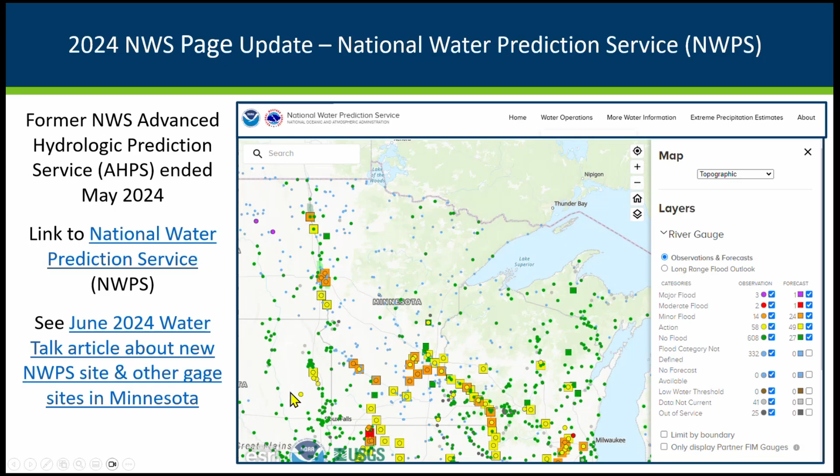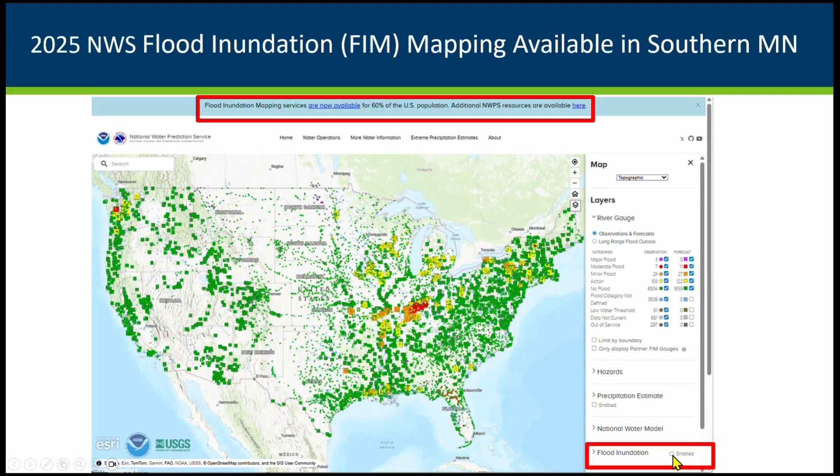The most recent update is that the National Weather Service now has what they're calling their flood inundation mapping tool. This is showing the national map. To turn on that tool, go to this flood inundation part, where there's a link to information at the top about this relatively new service. It's newer in southern Minnesota. To turn it on, scroll down below the gauge links and enable the flood inundation portion.

Zooming in on Minnesota, these reddish boundaries show that the southern part of the state now has that flood inundation mapping available. We understand the rest of the state will have it maybe in about a year, so not too far away.

While we're on this view, I wanted to point out the map options up here, because when you zoom in you'll probably prefer the satellite or aerial view. This example shows a site in Vermont, but this is what will be available in Minnesota for areas anticipated to have flooding in at least the next 5 days, as far as I understand how far out they're going with this. We had an article about that in Water Talk back last September that will give some helpful information.

This is an example of a clip I took this morning at a site in Indiana. I went looking for one of the gauges that was higher, and that red I know is the more moderate flood risk there, so I figured I'd show some interesting flooding. A couple things to point out: when you turn it on, it's really opaque, so you probably want to use the transparency bar. Also, you can turn on the county boundaries in this administrative boundary option.

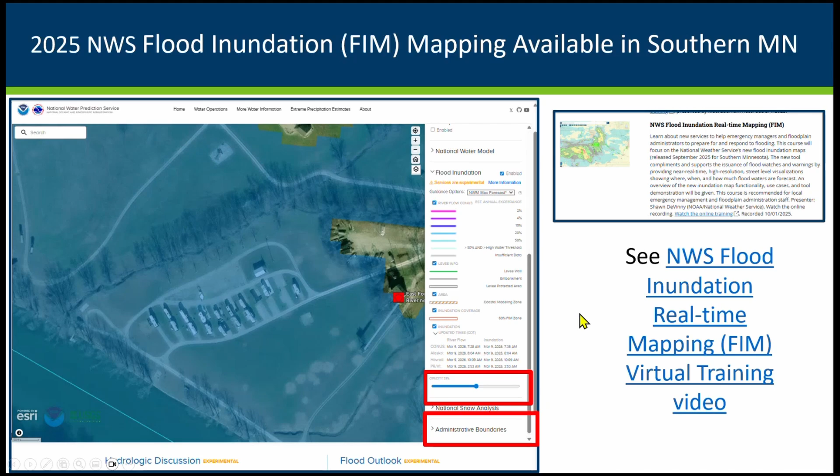We do have a recording of a training that Shawn DeVinny with the National Weather Service gave on using this site back in October, and that's available on our training site. This site is going to be really helpful in the future, and as we have higher water levels this season, we'll be checking it out, especially in that southern part of the state. Moving on, let's talk more specifically about your post-disaster responsibilities and substantial damage determinations.

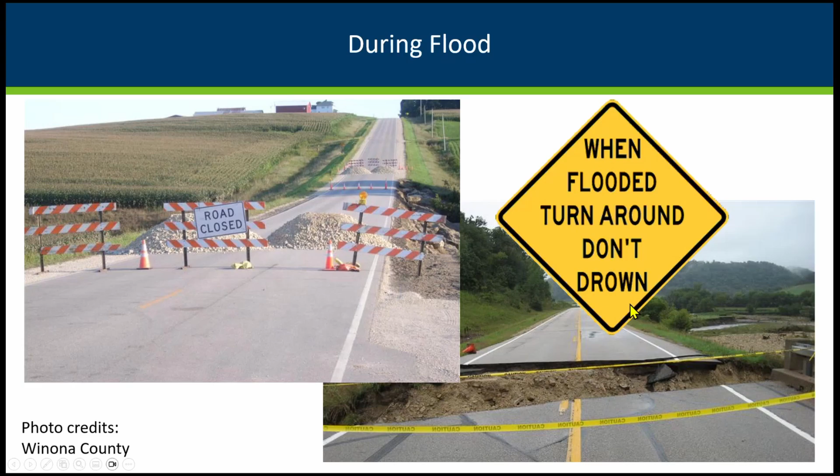Here's an example of a road that would have been closed during the flood. You can see how the water came across and washed away a part of that road. During the actual floods, that's one of the community responsibilities - helping to get the word out that you've got barriers up, that some of your roads are going to be closed. We don't want people driving through those areas because you don't know what's below that water that's on the road.

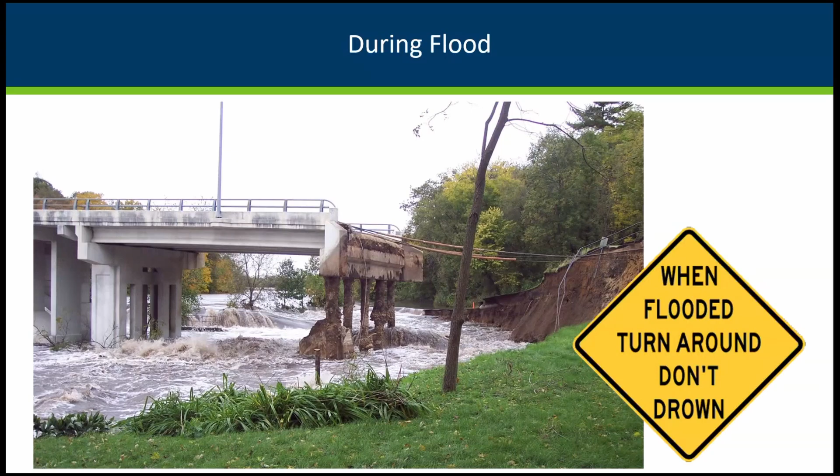Here's another example: if you're just seeing the road, used to going across this bridge, you might think you can get across, but you don't know what's happened to that bridge. So a big part of our education and communications during the floods is keeping people safe, keeping them away from places that have damage. We do know that most common death situations are people who try crossing areas that have been washed out, and people didn't realize it.

But you'll be happy to have those boundaries, those watermarks, later as you're trying to figure out how high the water level got, and trying to map out where in your city, where in your community, you most likely had the water and had damages.

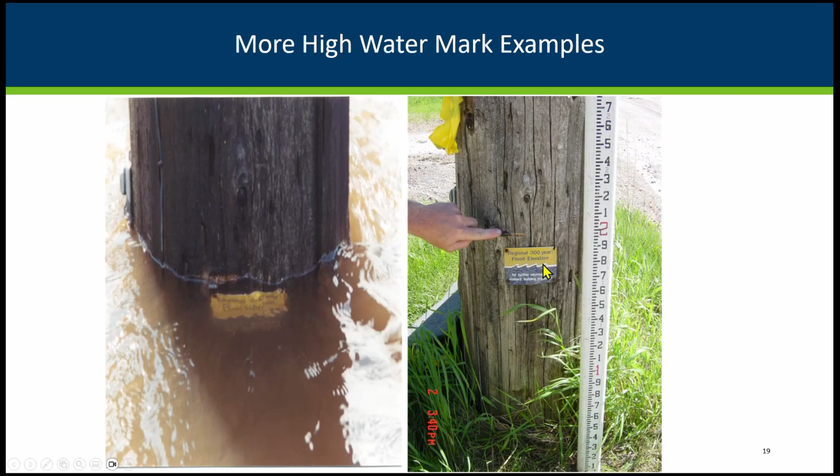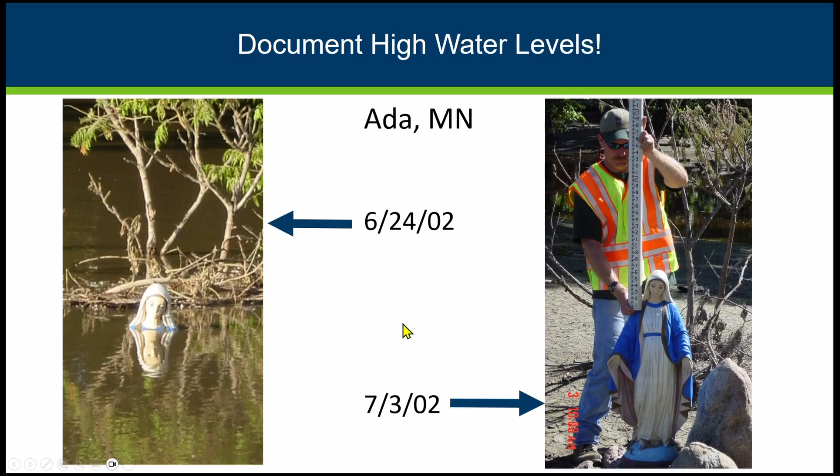The other thing at the local level you'll want to do is track your time for your staff, for your volunteers, looking at those hours and efforts in responding to the flood. Because if there is a state or presidential declaration, you'll need that documentation of what additional time, what overtime was spent, what additional hours were put in.

Communities are really getting good about using their social media for all different things. During the floods, we've seen communities do a great job of getting information on their websites, working with their local media, their radio stations or newspapers, and especially using social media - Facebook and various other social media sites. During the flood, it's those safety messages: don't go to this part of the city, don't go on these roads, they're closed.

And immediately after, there's a lot of questions about what do we do with the debris? How do we get help? How do we sign up for inspections and possibly getting some help from the state or the federal government? But also in your role as local administrators, reminding folks that they need to get permits to do repairs.

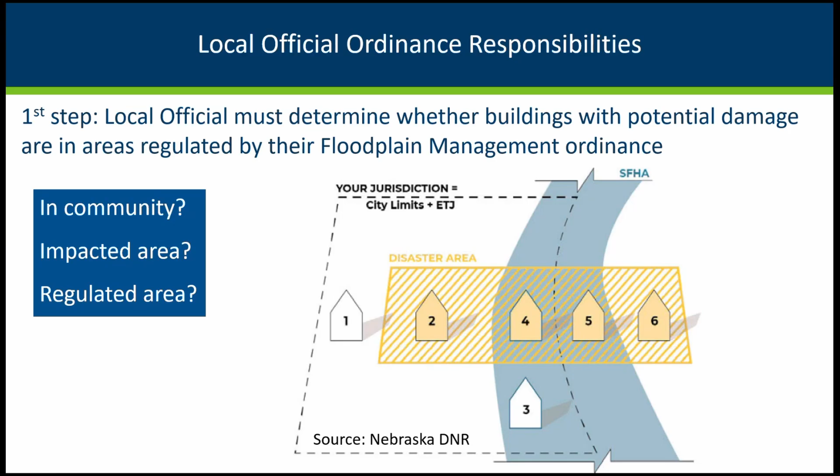And in this example, we're showing the special flood hazard area, that 1% annual chance flood is just this area. So out of all these buildings, we've narrowed it down to 4 in the community, 2 in the impacted area, and just 1 that's actually in the floodplain area where you must do those substantial damage determinations and require permits if there has been damage.

We do have this little flow chart because some people like flow charts versus checklists. And it does kind of step you through: Was it in the floodplain, in that 100-year floodplain where your regulations apply? Was it substantially damaged? If it's close or a yes, then you're going to go do that substantial damage determination. If not, then the community can issue a repair permit for whatever repairs need to be done, and that person can get right back in there and do those repairs.

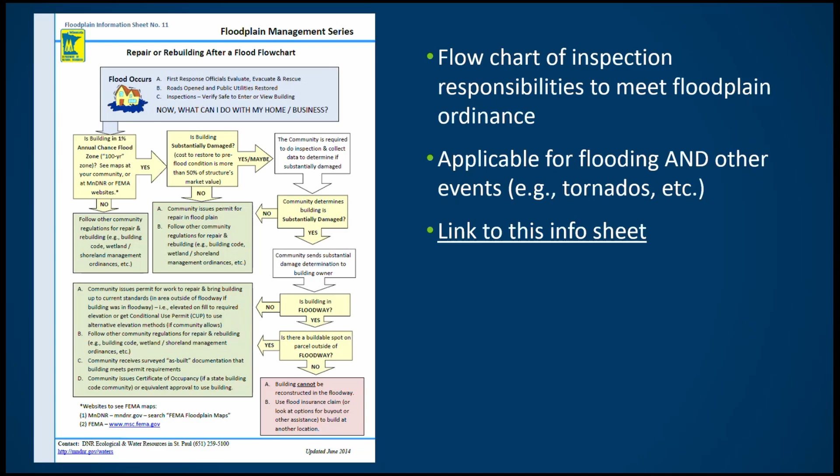FEMA does emphasize you need to be giving repair permits when you're having a big flood. Part of that is because folks have a tendency to, while they're in there doing their repairs, go beyond what was the flood damage or tornado damage, and do other improvements that they've been meaning to do while the contractors are doing the work. So you're being clear about what it is that they're repairing so that they're not doing substantial improvements and hitting that 50% trigger with the improvements and the damage together.

So you're going to review those damaged buildings. Again, even if it's not flooding, maybe you had a big tornado that affected a part of your community, you're going to be looking in the floodplain area if any of that tornado damage was in that floodplain area. You're going to look at, is it clear that they're substantially damaged? If so, you're going to issue them that determination. If it's something that's clearly not substantially damaged, maybe they had a little bit of damage, but it's clear that they're not substantially damaged, you can give them that repair permit, let them go on.

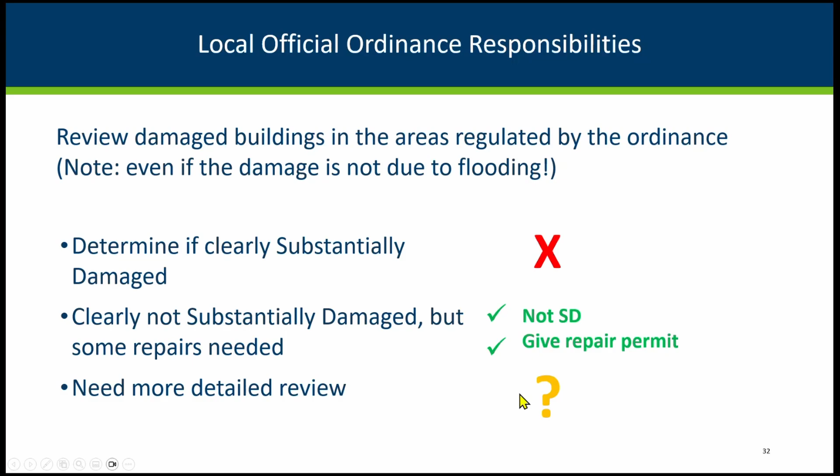Those that are in that 35 to 65% range, you're going to probably want to get more details, do a more detailed inspection. A lot of times, even if you didn't see where the water went, you didn't have good watermarks, you're going to have a pretty good idea just based on where the debris is that's in the community. Those are the neighborhoods that had the damage, and you're going to need to be looking. Some of your initial inspections and screenings can be more or less sophisticated.

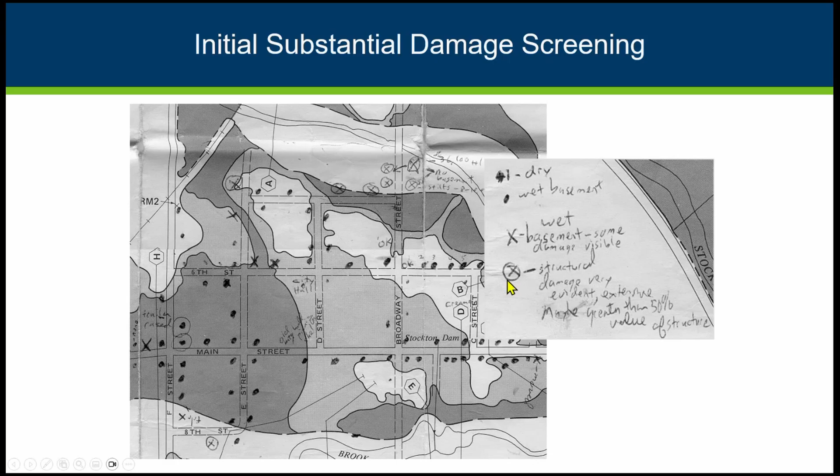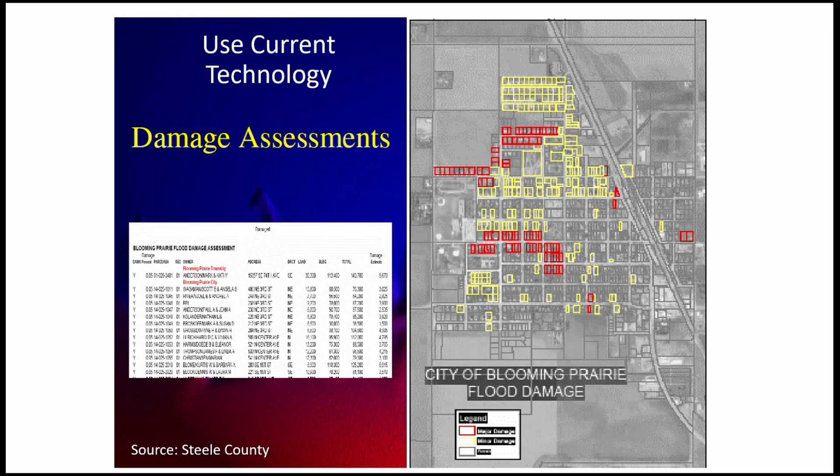This is an example from a small town. They literally went out there with the FEMA map at that time and marked which buildings they looked at, and which ones were potentially damaged more and needed a more detailed look. But these days, most communities and certainly all the counties have better GIS systems and are keeping nice electronic records that can be shared in different ways, showing where those damaged buildings are.

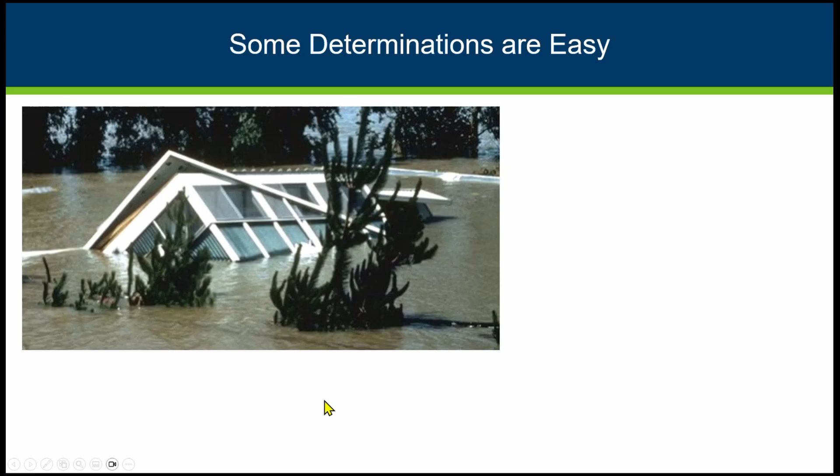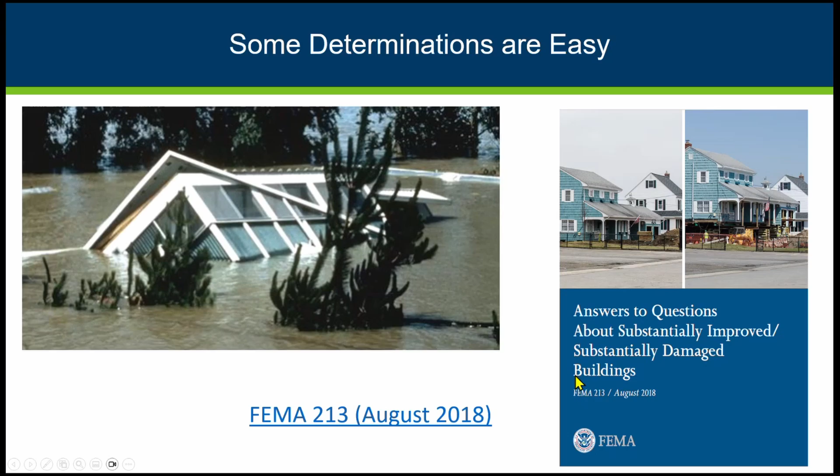Some determinations will be easier than others. Here's an example of a building that was clearly substantially damaged. If you're seeing manufactured homes with any amount of water on them, they're usually considered substantially damaged, based on what we've heard from people who've been involved in many different kinds of floods in the past. Here's one of the FEMA documents that's more of a summary of some of the most common questions about substantial improvement and substantial damage.

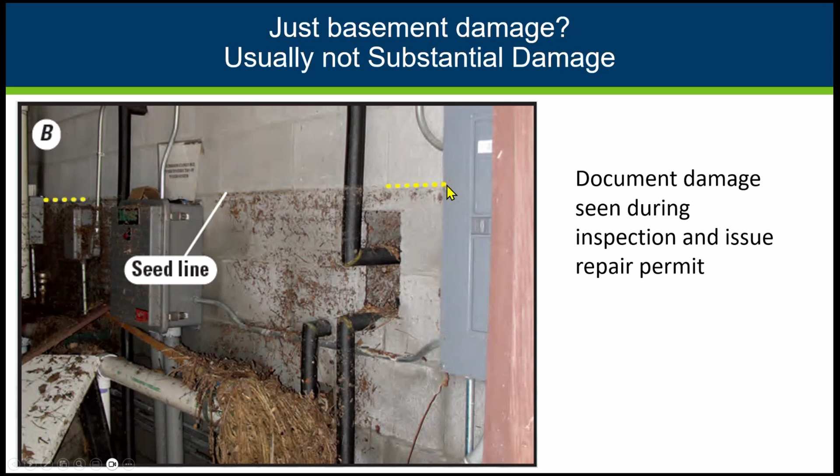In basements, which is where a lot of our flooding still occurs in Minnesota—we like our basements, and we've got a lot of them, especially in buildings built before we had floodplain maps—usually it's not going to be substantial damage in a basement. Most commonly, you're going to have damage to the furnace, the water heater, maybe some other utilities, but usually it's more the cleanup you're looking at. There can be cases where you've got foundation damage; there you're more likely to see substantial damage. You're getting in there, documenting it, taking pictures, making sure those pictures are associated with the correct address and PID, and documenting what happened there.

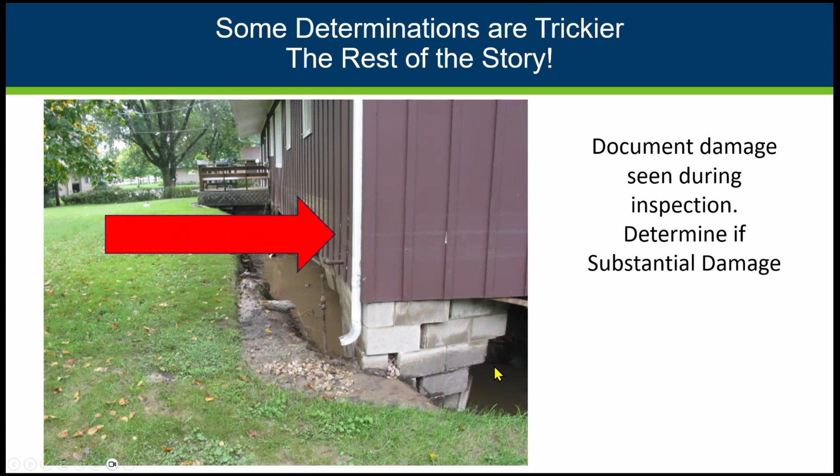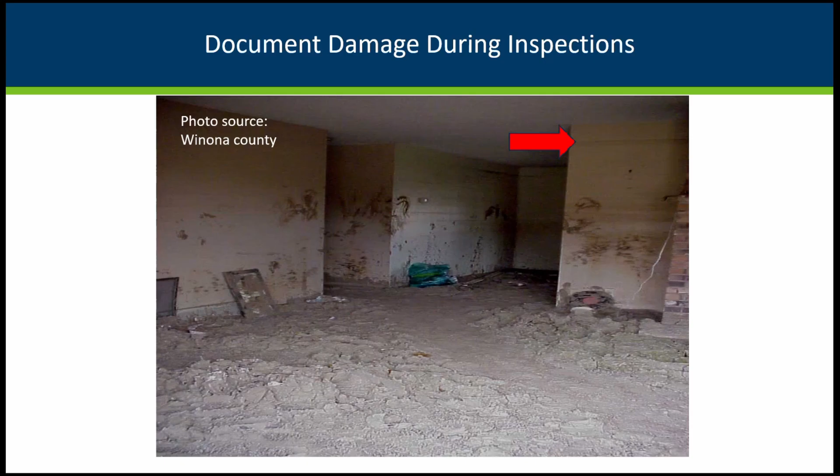In our playbook, we have some tables like this, based on experience gathered over time, showing what depth of flooding for what kinds of buildings you're most likely to see damage. So for a 1-story on a slab, if you get up to 1.5 or even 2 feet, you're more likely to have substantial damage, whereas with 2 stories you go up a little higher, which makes sense. If it's a mobile home, pretty much any water—if they get even half a foot up on the main level—it wicks up and damages the whole building. That's something we see and hear consistently.

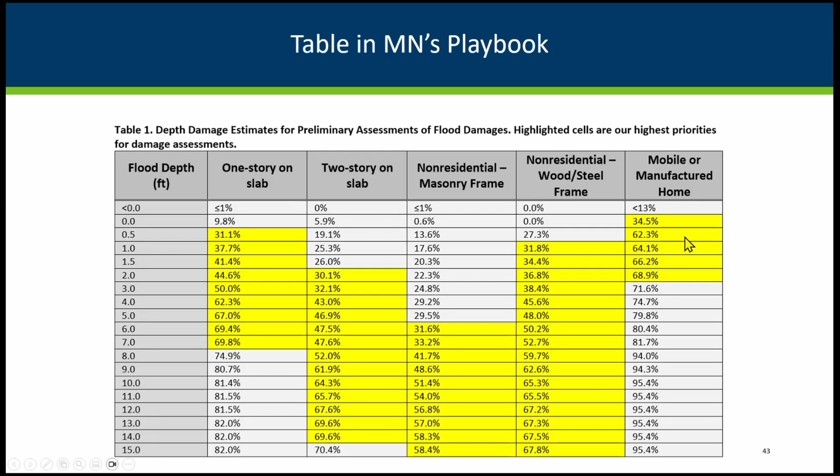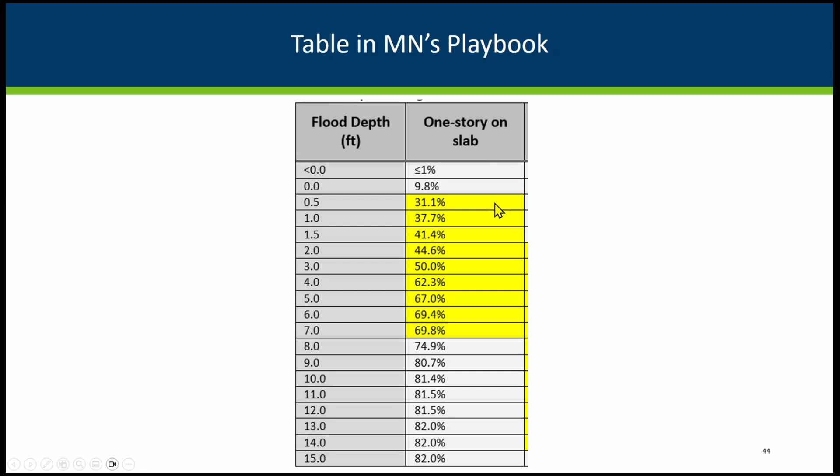So here, zoomed in a little more—communities might use this and say, okay, there's only basement flooding, we're not going to worry about it. But here we look at water getting onto the main part of the building, we're going to look more closely. When we do have potentially substantial damage, you need a more detailed review, breaking out all the different components—how much damage to the walls, the roof, the interior, in all these different categories.

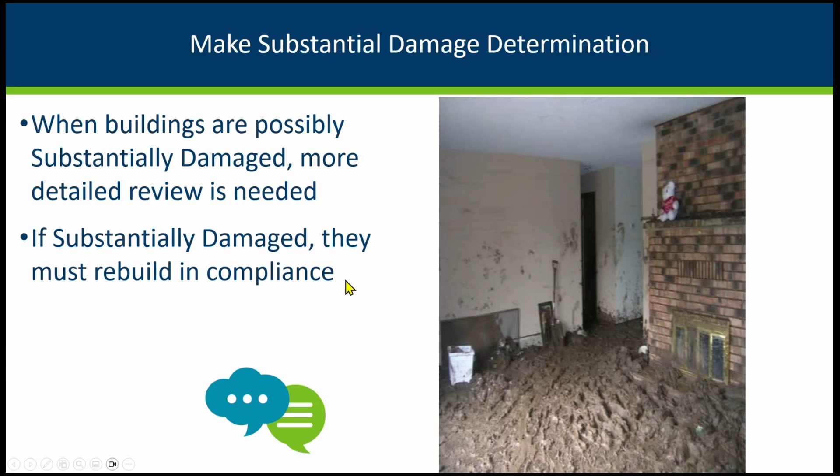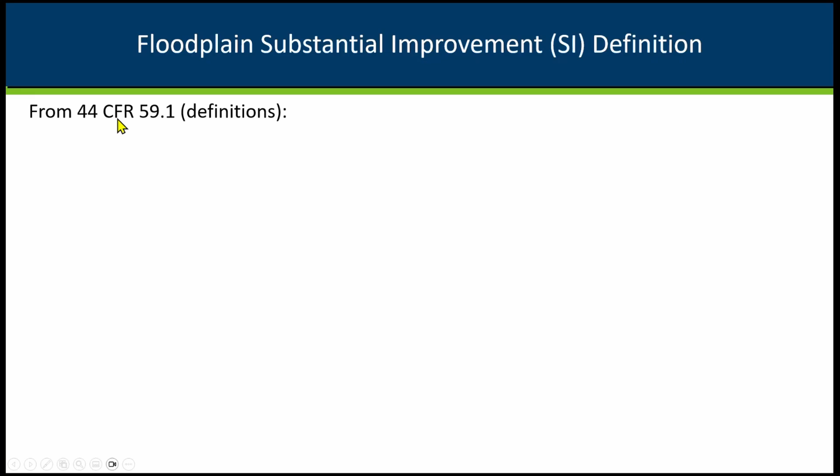We've talked about how this applies for flooding and for other kinds of damage, but I want to compare substantial damage to substantial improvement. From the federal definitions, the 44 Code of Federal Regulations, in the definitions section, they talk about what substantial improvements are.

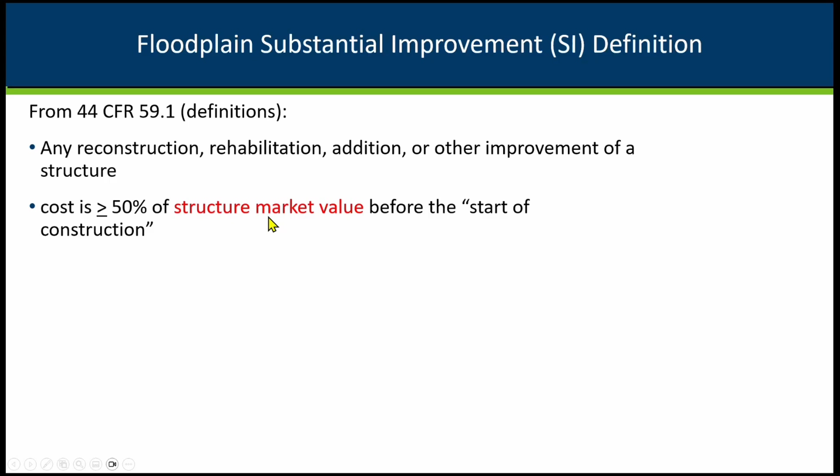And that includes reconstruction, rehabilitation, addition, or other improvement of the structure. That's the 50% trigger of the structure's market value before the start of construction. And when you're doing that, you're also looking at any repairs and improvements made within the previous year, along with the damage you're fixing at the same time.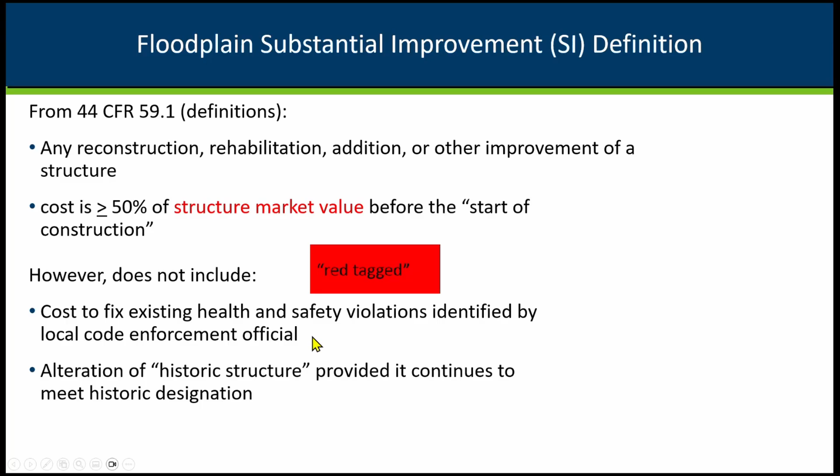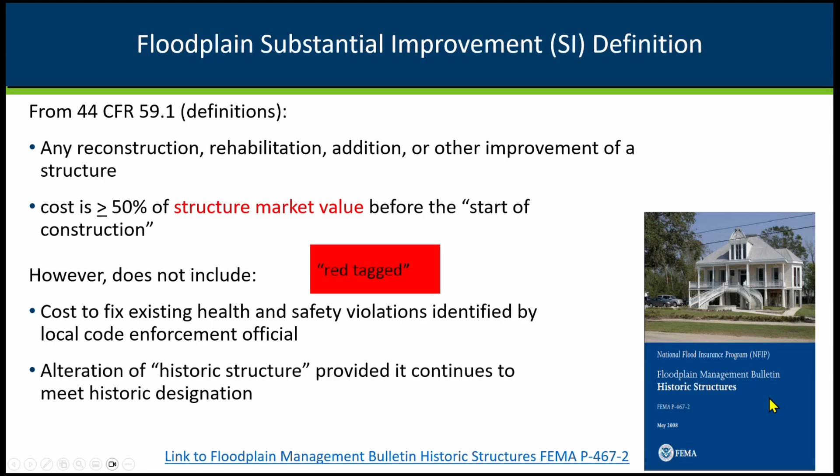There is some wording that says you don't have to include the cost of fixing things that were identified in advance by a government official—say they had red tagged the furnace or the electrical. Or if it's a historic structure, there are different rules, with a lot more flexibility on what you can do to repair it if it's officially designated as historic.

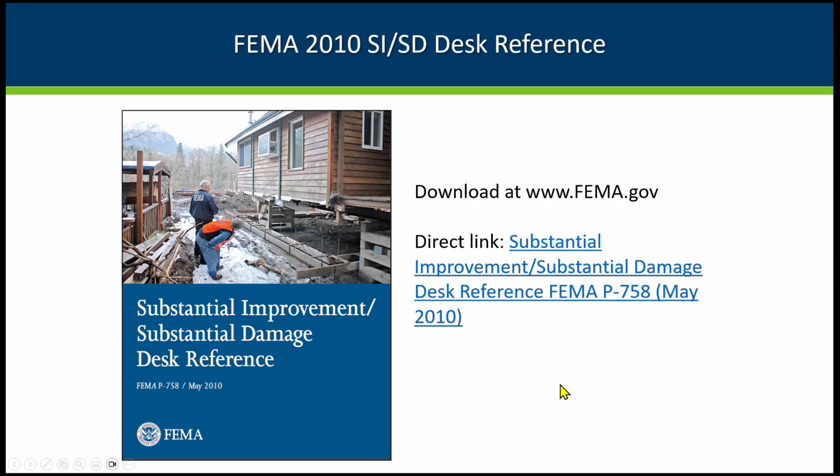FEMA's desk reference here is about a half-inch thick document, and there's a link here. It's a really helpful document that gets into a lot of nice detail, with flow charts to get you to the right part so you can determine if the damage is possibly more or less than 50%, whether it's substantially damaged or a substantial improvement, or not. It breaks things out nicely.

While we're talking about how you figure out market value—in most counties in Minnesota, the most consistent way is to work with your county assessor to see the assessed value for the buildings. In our county records, assessors show the assessed value separate for buildings versus land, which is good because we only want to look at the market value of the building itself.

In some cases, they may need a multiplier. I haven't seen that so much in Minnesota, but definitely in other states the assessed value might only be like 80% of the market value. That's something usually known at the county level, what kind of multiplier you need.

And if folks don't like the assessed value you're using, they have the opportunity to appeal it. In most cases, communities will accept an official appraisal as the appeal. If that appraisal shows the building has a higher market value, you can use that for determining whether it's substantially damaged or not, and you'll make sure your assessor's office has that for tax purposes going forward.

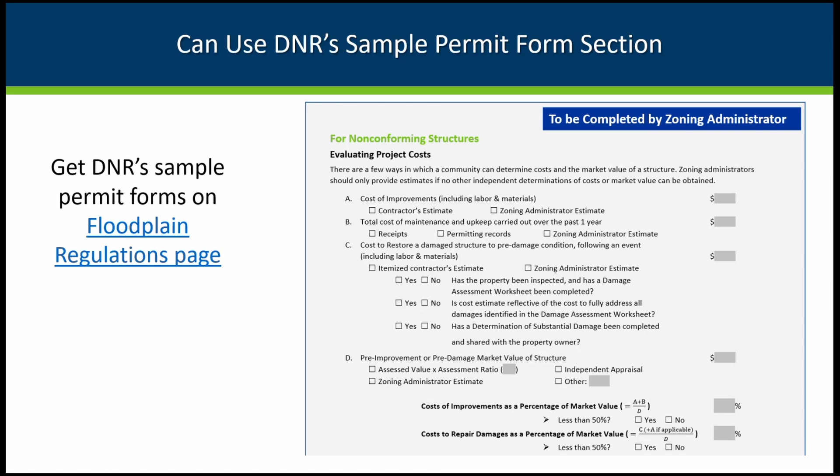DNR has a sample permit form—a simplified one for non-buildings, and this building version. For those non-conforming structures where we're looking at whether it might be substantially damaged, we step you through the steps to determine that. In our playbook, we follow fairly closely with what we've got in our sample permit form.

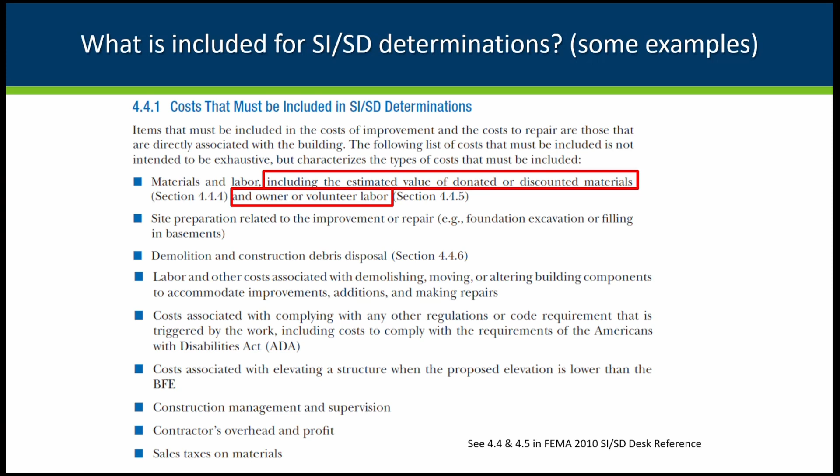In that FEMA desk reference, one of the other things they have is a nice listing of what must be included in the costs. A couple key things: someone might say, well, I'm just going to do all the work myself, or I'm getting volunteer labor—I got a bunch of buddies, I'll pay them with a case of beer and we'll do the work. Or, I've got all this material donated to me, so my cost is basically nothing.

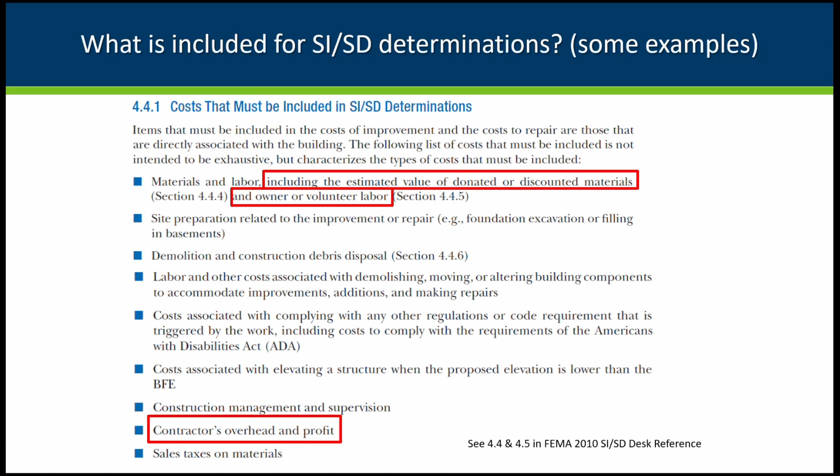But what the guidelines say is that you've got to look at what the cost would be if it was a contractor doing the work, not volunteer labor—you've got to look at what that equivalent value is. The FEMA specifics also point out you would include typical overhead and profit for a contractor in that part of the state. And it has a nice list of some things you don't have to include, which can be real helpful to make things clear.

In our playbook, we have a sample letter for when you do the determination and it is substantially damaged. In our example, we're showing the calculation at 60% damaged, so we have a sample letter you can put on your community letterhead and send to that household, notifying them officially that they are substantially damaged and that they'll need to work with you on bringing that building into compliance with your current ordinance.

And if they do have a flood insurance policy, making them aware that they then would be eligible for what's called the increased cost of compliance rider on their flood insurance policy. That increased cost of compliance allows up to $30,000 to go toward the costs of bringing that building into compliance, whether that's bringing in a house mover and elevating the building and putting in a new foundation, or moving it to a higher place on the site.

Maybe they're filling in the basement and adding on some other areas to make up that lost space that they've got there in the basement, those kinds of things.

And the things that are eligible, you use FRED to remember that: floodproofing, if it's a non-residential building; relocating; the cost to elevate; the cost to demolish. And again, the ICC will pay that amount up to $30,000 for those costs. And from what we hear around the country, that's actually on the low side for many places, the costs are more than that. But in order to be eligible, they have to get that floodplain administrator to make that official determination so that person can hand that to the insurance adjuster that's looking at their claim.

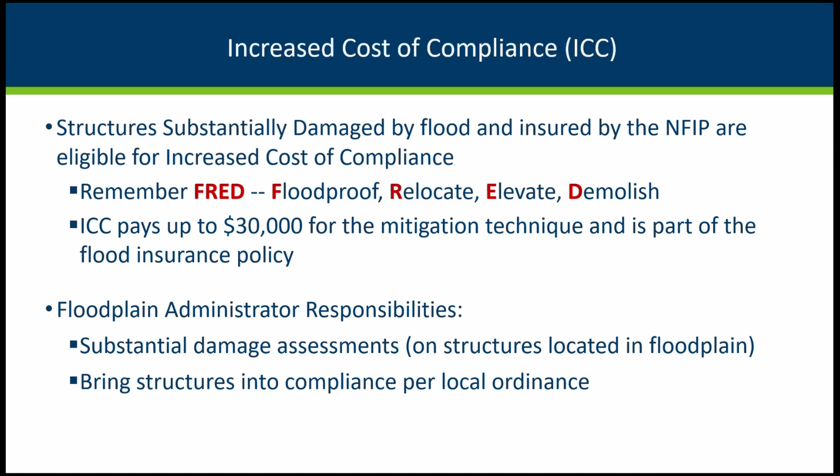The other thing to keep in mind is that if you have the wording in your ordinance, there are two ways that the increased cost of compliance can be triggered. It's always going to be triggered if there's substantial damage. But if you have the language in your ordinance that says if you've got flood-related damage 2 times within 10 years with an average damage of 25% or more, so the two claims together are over 50%, that also will qualify for getting that increased cost of compliance funding.

We've had it in our model ordinance for over 10 years now, and most communities do adopt that, which can help your citizens if you do have a couple of floods within that 10-year period. Then they would also be eligible to get that ICC funding, even if it's not substantial damage from one event. And again, the options are to floodproof if it's non-residential, relocate to higher ground, elevate in place, or the cost for demolition. Also, even if they aren't substantially damaged, you're not requiring them to bring it into compliance.

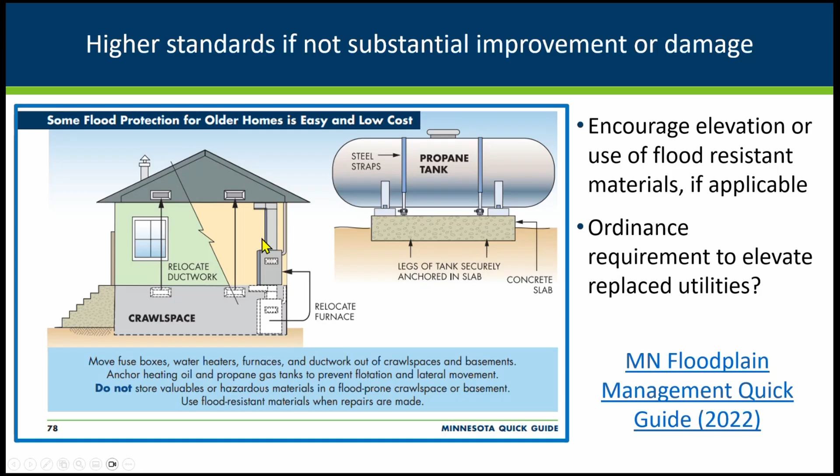I want to mention that this is not a minimum requirement. We have had communities in the past tell people that they had to replace their furnace on the upper level, but then got challenged and it wasn't actually in their ordinance. This is a nice higher standard that we would encourage you to consider, that if utilities like this are damaged, that they're required to be elevated, even if it's not the whole building being substantially damaged.

Shifting gears here a little bit, getting back to talking about the declaration process, the state and federal declaration process. I mentioned earlier that soon after the flooding occurs, they'll be getting in there and doing preliminary damage assessments if they think that it's a big enough flood or other type of disaster that they might be hitting the triggers to qualify for consideration of a state or federal declaration.

Usually they won't go in the buildings. They'll be doing more of a quick eye check of where the damage is. And the public assistance, they'll be looking at funding for that to help pay for the emergency response efforts, and then longer term repairs for that public infrastructure and public buildings. Individual assistance, again, is for homes and businesses.

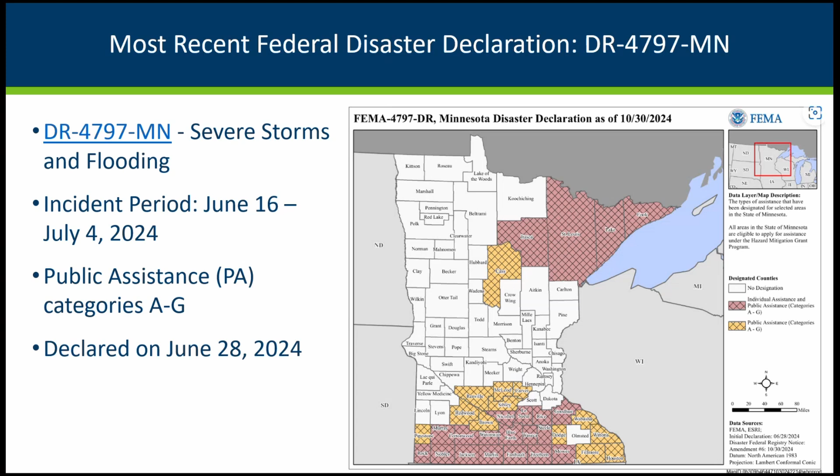But again, that's not common in Minnesota. It's more common for us to have public assistance, because roads, bridges, and those kinds of things are more likely to get damaged during our floods.

But if we do have individual assistance, FEMA will deploy lots of folks usually to help. Our state Homeland Security Emergency Management folks are definitely out there in force, along with local emergency managers, getting help at the local level, seeing who needs help, who doesn't have a place to sleep and live. And they'll set up disaster recovery centers.

In 2024, we did see how FEMA set those up. They tried to set them up in the communities where the most damage was, so people didn't have to travel very far. They also warn folks about scammers, noting that FEMA staff will be properly identified and won't ask for credit card numbers or those kinds of things unless someone goes to those disaster recovery centers and is going through the process there.

But the other thing we want to point out is that even if individual assistance is declared, most of the aid is not grants, it's not handouts. Most of the aid is going to be a Small Business Administration loan that has to be paid back.

When they do give out grants, they first look at whether the person has insurance covering their loss, and whether they were eligible for an SBA loan. If they're not eligible for those things and they have great needs, that's when they look at grants through the individual assistance program. The maximum amount you can get for that grant is not a ton of money—that's for someone who's really been damaged and has no resources available to them.

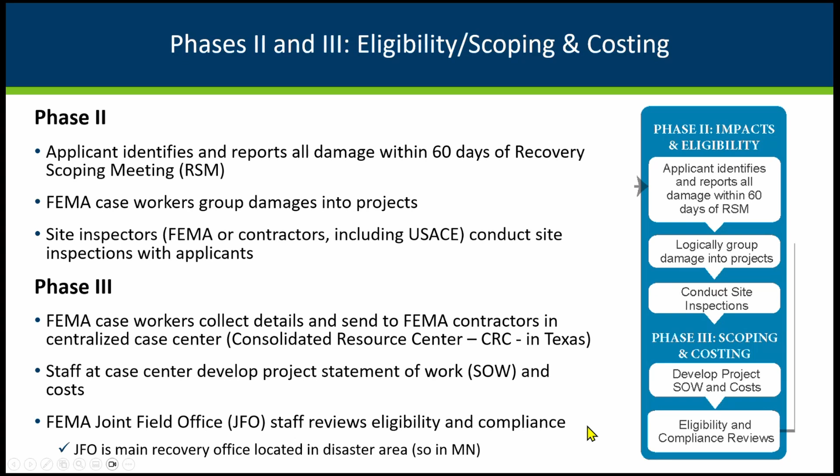They're doing inspections, working with communities to figure out what kind of improvements or repairs are going to be needed, then writing up more exactly what's going on and getting the joint field office staff involved in making sure the application is in compliance and eligible. Finally, there are final project reviews, including environmental and historical preservation requirements, getting the funding obligated, and doing the work. Once the work is done, documenting that it met what was required and getting it closed out.

When we were presenting this with FEMA staff, they pointed out these are some of the key points communities would be involved in: the applicant briefing, which happens fairly quickly after the flood; the recovery scoping meetings, usually a few months out, where sometimes there's turnover in the FEMA staff involved; and finally when the actual work is completed and can be signed off on so you can get your refunds of what was spent.

FEMA has this public assistance program policy guide, updated just a little over a year ago. One thing to look at, which we really encourage, is Section 406, a program to consider whether we really want to build back the way it was, or find some things we can do to make it more resilient into the future.

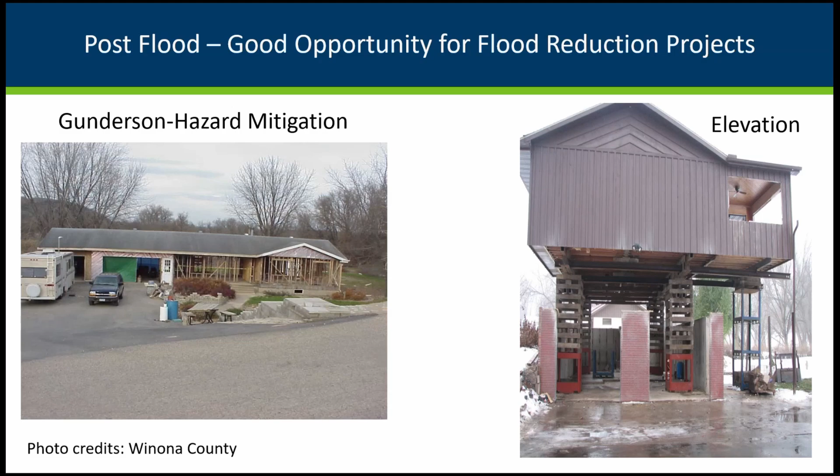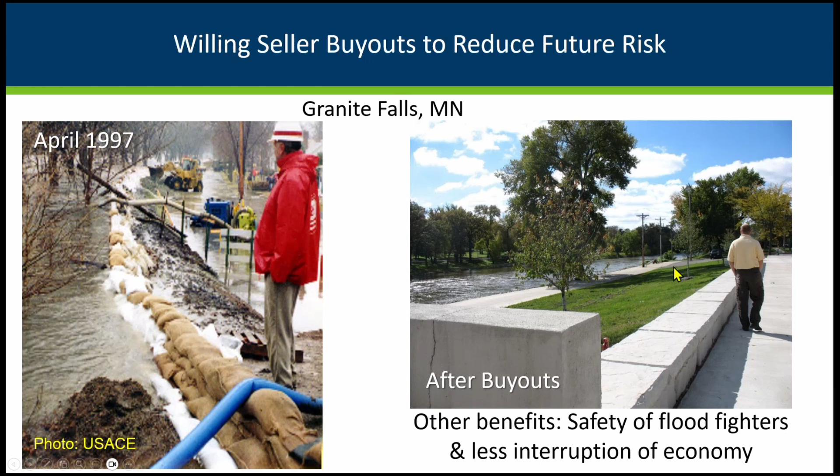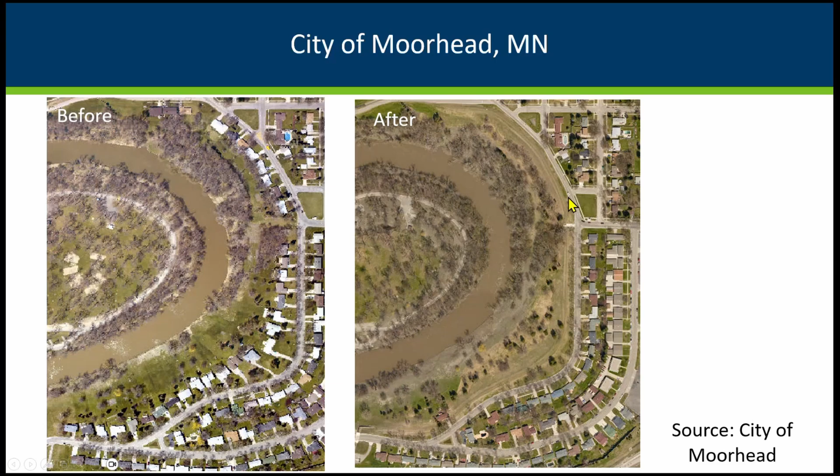In this example in Granite Falls, they actually bought out the city hall and some main buildings along the river, leaving a nice open spot to make it easier to protect the remaining buildings in future floods. In Moorhead, they did a lot of neighborhood-level work where they had buildings on the riverside and have now removed most of them—there's one holdout still—and put in neighborhood levees to protect the remaining buildings.

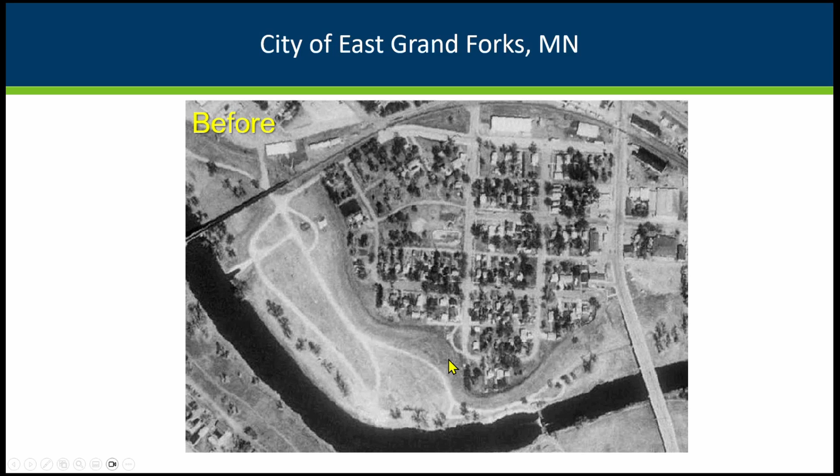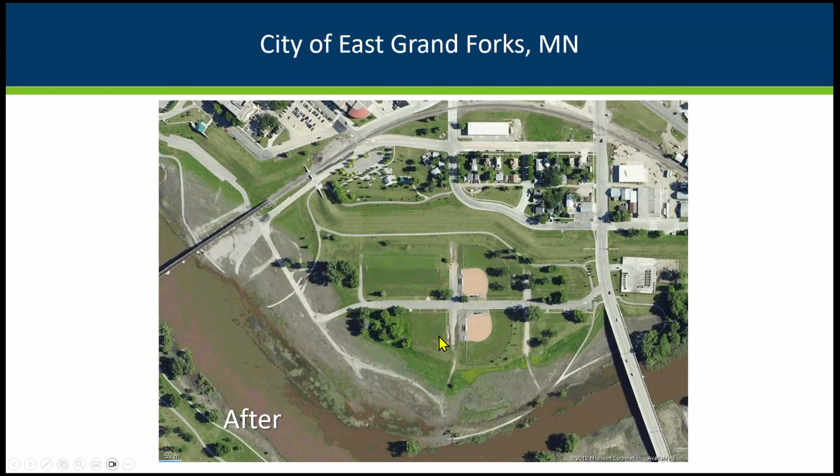East Grand Forks flooded greatly, especially in '97. Here's what it looked like before—they had this barrier here. They brought the levee way back, turned more of this into open space, and put in a nice flood wall and dikes around the city to protect it. They've had big floods since '97 and had very little damage.